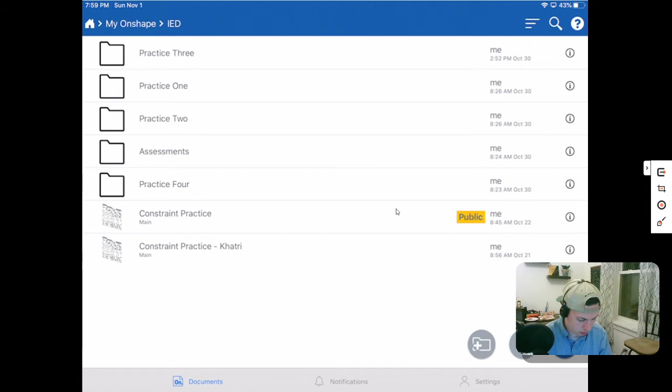So let's go into our Onshape document. This is going to be in Practice 4, so let's create that new document. It is Super Mario Brothers 2.

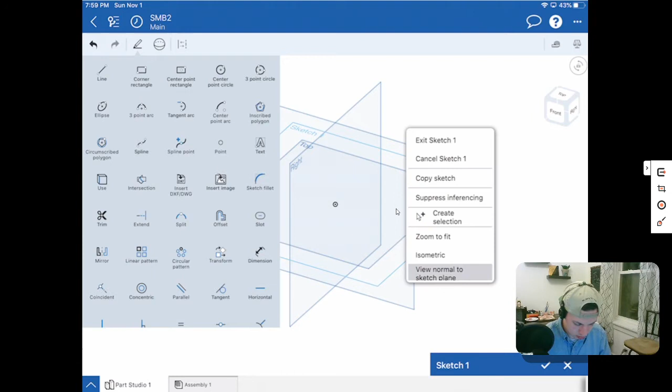I'm going to start by sketching on our top view over here, and view normal to plane. Then I'm going to draw a line — this is going to be the center line all the way through it. Let me undo that.

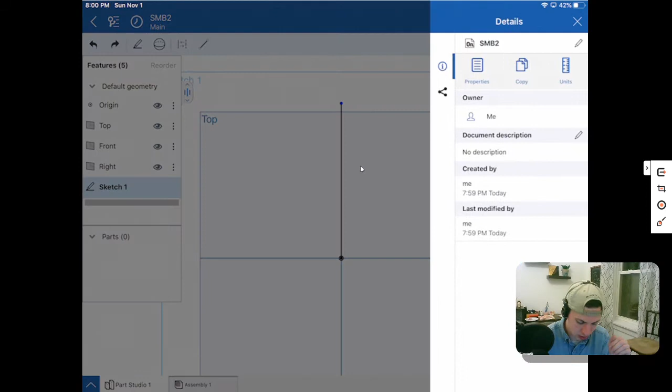Now what I should also point out is that this drawing we're doing is metric. So I am going to change my Onshape settings — our units, we want to change our length from inches to millimeters, simple as that.

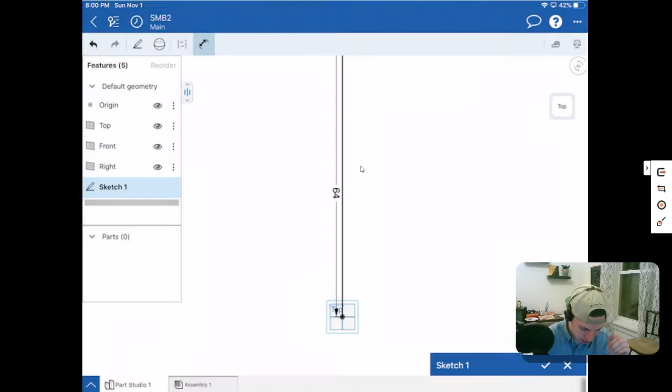Now I'm going to dimension this line from there to there — this is 64. I don't think it quite got that the units were changed. Yeah, there we go — it didn't quite change those, so we'll set that back at 64.

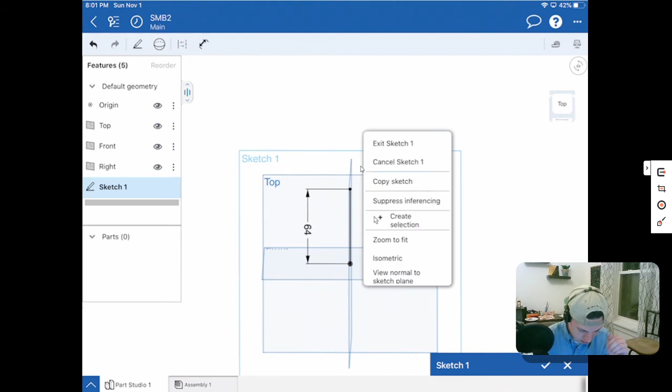Now the next feature I'm going to draw is the circle and the arc over here. So we have a circle — it is a diameter or a radius. Our outside is a radius of 15, while the inside circle is a diameter of 15. So let's draw both of those.

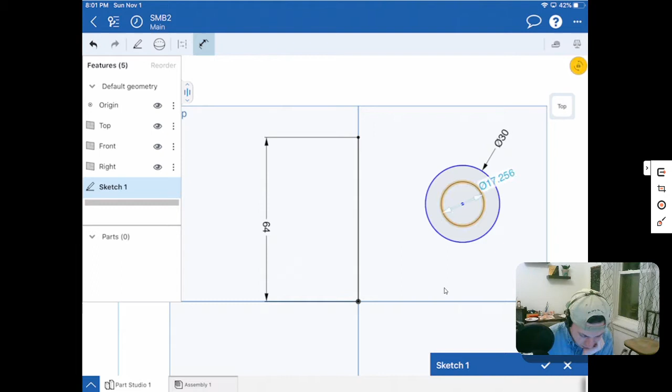Inside of our view over here, I am going to draw a circle with a center point here, and then something that shares the same center point out here. The first one I'll dimension with a radius of 30, or a diameter of 30, because it has a radius of 15 — that's actually our arc. And then this one will be a diameter of 15. So we have both of those.

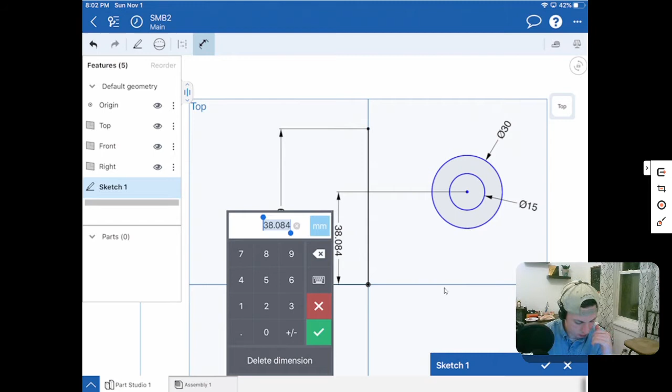Now we can also dimension our center point to our origin, but we want to make sure it is going out like this and it is flat. We don't want an angular dimension, so we want our dimension to be going straight up and down, vertical. And then this is half of 64, which is 32.

Now we need to find our dimension from there to there, but just our horizontal distance from our origin. When we look back over here, we can find that our horizontal distance is 38. So we'll set that at 38.

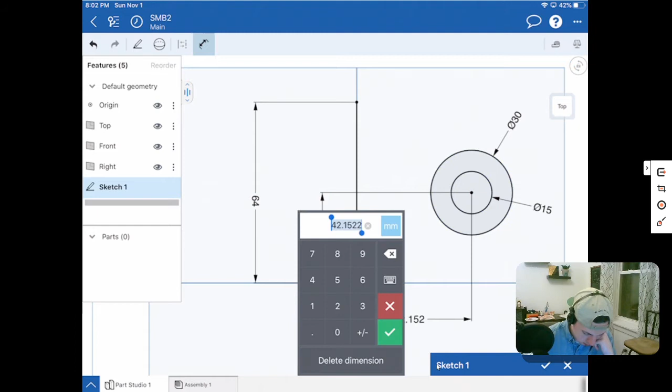Now the next thing we need to do is a real minor detail, but it is important. We want to make sure we have this edge right here — this is a flat edge, and then we go tangent. So we want to draw that flat line over here. In order to do that, we need to find the distance. The radius of this arc is 15, which means from the center to the outside is a unit of 15, so this length right here is 15. Then we can make our tangent point.

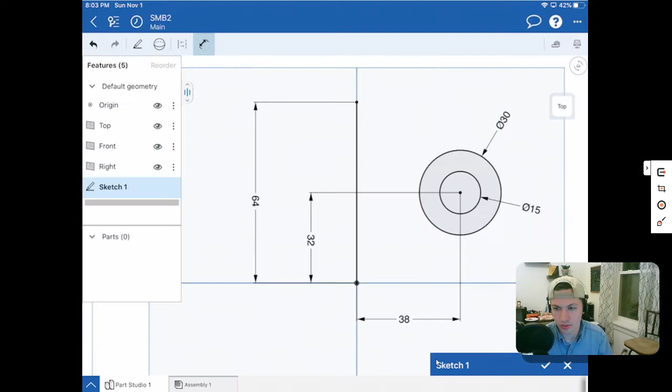So let's go into OnShape, and then we are going to draw a line over here from here to here, and then dimension that.

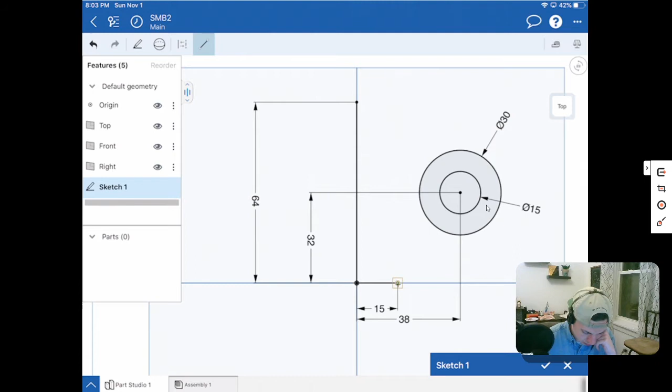So this unit right here is 15. Now when we draw a line, we'll draw from this end point to our circle. Once we get those dotted, it's going to say that it is tangent and it just pops into place right away. But I'll show you what it looks like if we didn't do that.

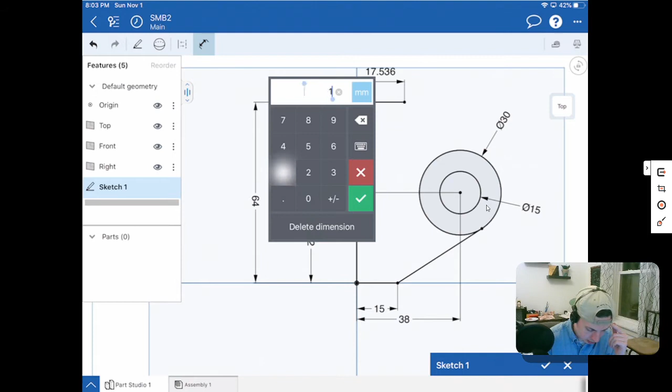If we weren't going that route, and we still have to do this on the other side, so you should follow along. This line over here, if we go from there to there, we want to make that 15. But when we draw a line, if we draw this and we don't have it connect except to the edge, it's not going to be tangent and we get a blue line.

So in order to change that, we'll highlight the line and the thing that we want to make tangent to, and hit our tangent constraint. Then it will snap into place.

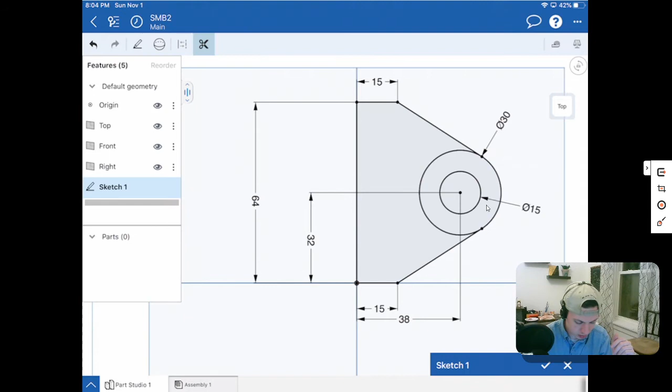Now we're very close to being done with this first part of the sketch. The one thing we do have to do is trim out this section over here. Get rid of that. All right, so now that is all done, I can finish my sketch.

I'll view that isometric. I'm going to turn off all these points except for my origin. I may need to reference that a couple more times, so I'm going to keep that on.

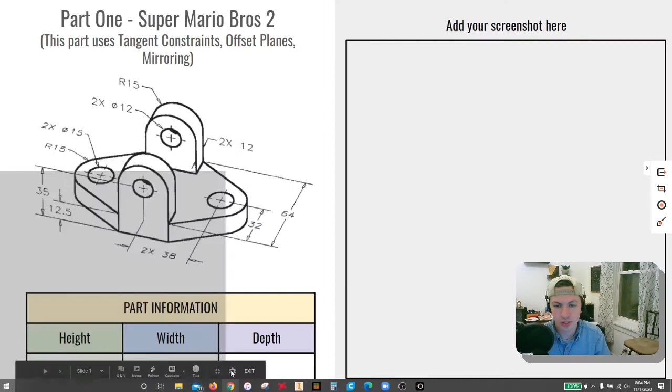All right, so let's extrude that bottom face that we just made. It's a new solid, and I believe it's 12.5, but let's double check. It is, yes, 12.5 millimeters that we are extruding up.

All right, so let's go back into Onshape. We are going to say our depth is 12.5. We'll extrude that, and we're going to hit our check mark.

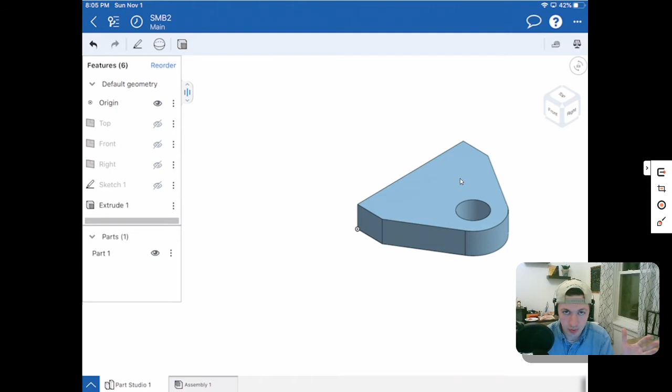Cool. Now, the reason that I just drew half of this is because it's so much easier just to mirror everything that we've already done. So let's go about mirroring this.

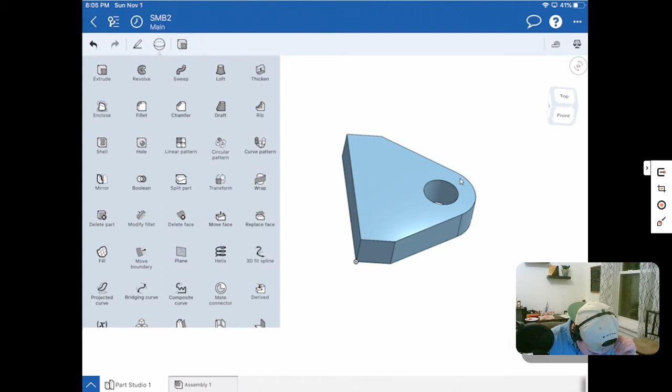So what I'm going to do is go to my 3D modeling tools, and I am going to find my mirror command. Ah, there it is. It took me too long to find it.

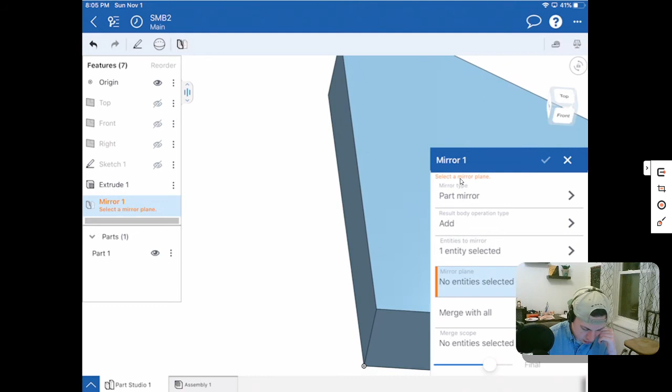It's right over here. So with mirror, we're going to add, and then the entities that we want to mirror are part 1. Then our mirror plane, the thing we want to mirror it along, is this face over here. Then we get an identical replica that has just been created.

We can merge them all together. Merge scope doesn't really quite matter, it's going to throw together because we've already added it to the operation. If we're creating a new body, we could merge them together, but we don't really want to do that.

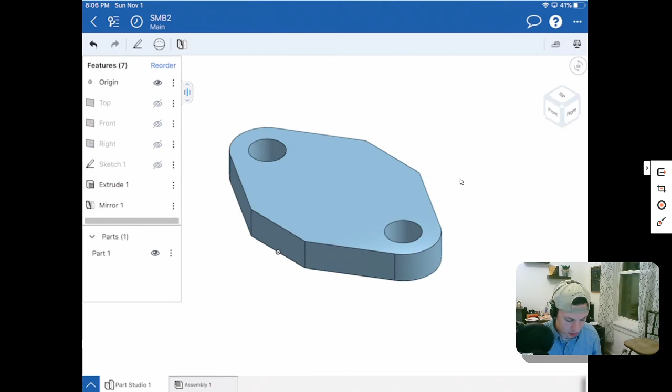All right, cool. So now we have this part of the shape done, and I now want to draw those towers that appear on both sides. So let's go take a look at those dimensions real quick, and then we can throw those onto here.

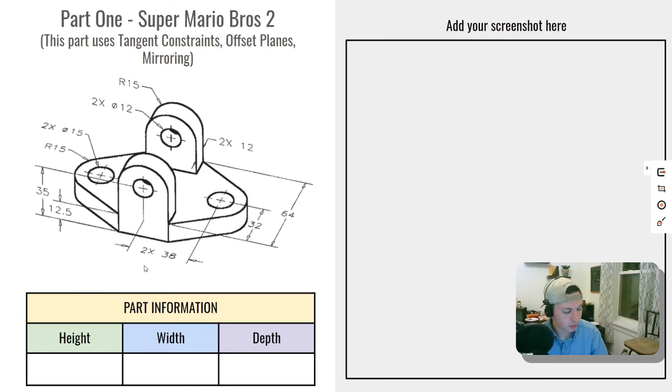All right, so we already drew the little base over here, but let's figure out from our edge, or from the bottom edge, we're going up 35 and placing a circle that is a diameter of 12 with a radius 15 arc around it, and then that just comes straight down. So that's pretty simple enough, let's just go and do that.

So I'm going to start a sketch on this little plane over here, and I'm going to view that normal. Cool, so now let's grab a center point circle. You can see it lines up with the origin. I knew I kept it for a reason.

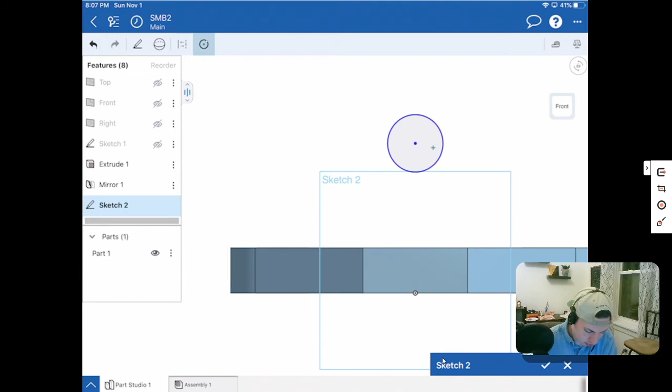Perfect, and we're actually going to draw 2 circles. So the first one had a radius of 15, so we're going to make that a diameter 30, because remember, we're dimensioning it right now as it is a circle.

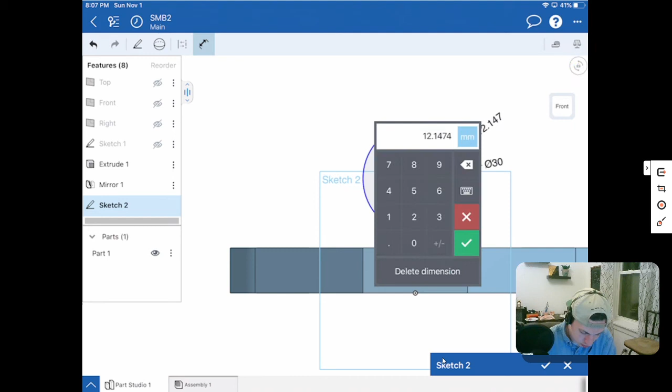But when we actually measure it, it will be a radius once we have trimmed it. So we're going to set that at 30. And then this inside is actually 12, which I was pretty close to. All right, so now the next thing that we need to do is set the height of it. So from here to here, that was a distance of 35.

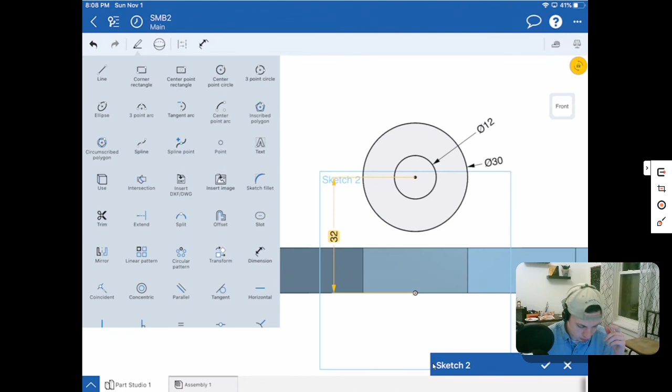Double tap the dimension to make an edit. I want to say it was 32. Let me double check. It was 35. I'm glad I double checked that. So I'll double tap there and make that dimension 35.

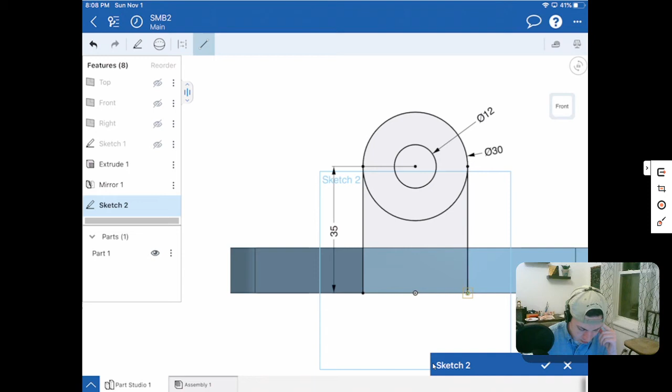Now we're going to take our line command and go from this corner down here all the way until it intersects. We'll do that again for the opposite side, all the way down from the edge down there. And just for good measure, I'm going to draw a line connecting these two at the bottom here, so we have a fully formed shape.

There's no open edges. I'll take my trim command and trim out the bottom part of that arch, then click done. Then I can view that isometric and now I am going to extrude that.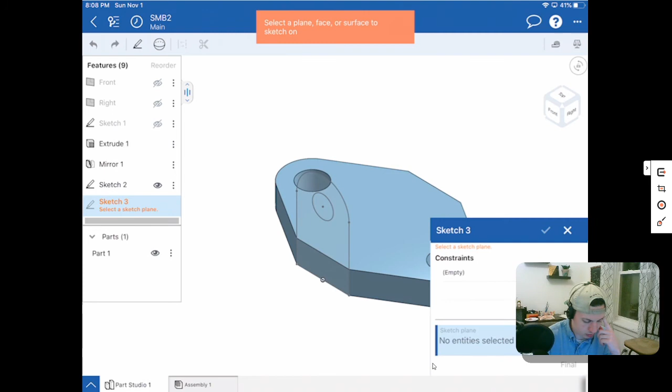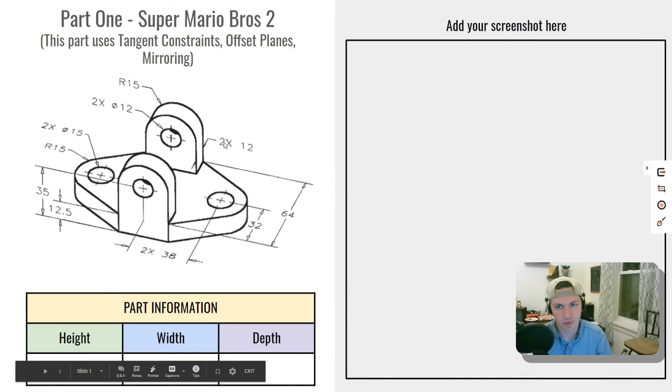So we'll extrude that. We don't want it to be new, we want to add. We'll switch to the opposite direction and then set the distance that we are extruding inwards. If we look at this, it's a thickness of 12, just 12 over here, that's that dimension over here. It's saying that it's 2 times because we have 2 of those pillars, but I'm going to show you a trick once again. So we'll set that to 12 and hit done.

There we go, we are so close to being done here. Now the last thing we're going to do is a totally new command. When we start a drawing, we get 3 planes that start: our top, our front, and our right side plane. Now we can create more planes than just these.

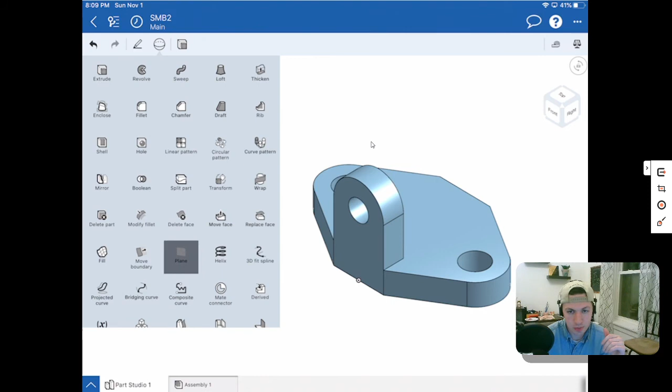So how we do that is inside of our 3D modeling commands, we have this command right here, plane. When we choose that, we have different types of planes: plane point, line angle, 3-point, mid plane. I'm gonna do the offset plane, it's one of my favorite planes. What you need to do is select a plane to offset from.

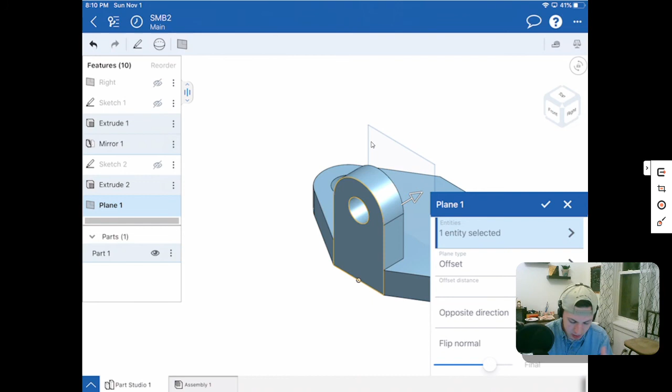So I'm gonna offset from this face and move the direction inward this way, and we want to make it right down the middle. So our right down the middle point would be 32 millimeters. Now I'll hit my check mark over there, and if I look from the top view, you can see that plane occurs right in the center.

Now we can use that as our mirror plane so we can practice mirroring once again. So I am going to go into my 3D modeling tools, select mirror, and I'll choose... let me start that over. 3D modeling, choose my mirror, and I'll choose— oh, it's having me select the whole part. Well, maybe if we choose add.

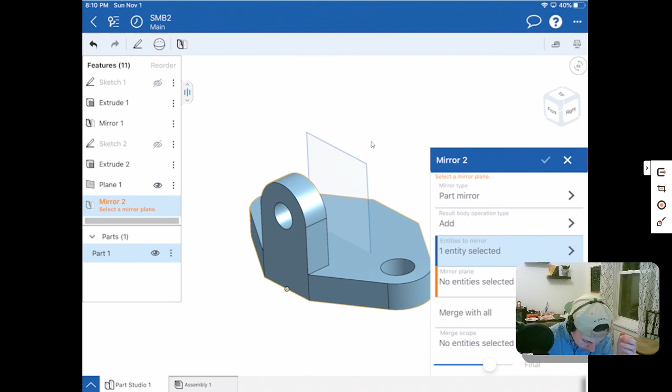Mirror feature, we just want to select the mirror type of mirroring feature. So I am just going to select my extrusion number 2, that's going to be the feature that I want to select. And then our mirror plane, we're going to select that right there. And bada bing, bada boom, we have done it. I'm going to turn off the mirror plane, just like the visibility of anything else that we have done.

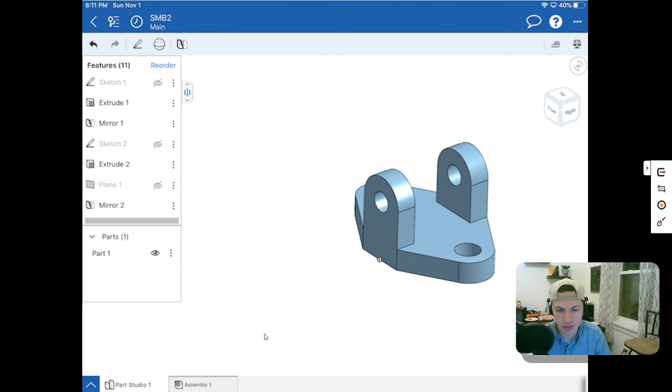Well, let's visit our sketch, make sure that we didn't forget anything. Yeah, looks all good. Cool.

So now we'll go back into our drawing over here and check how we did with our volume and mass. There we go. So we get a volume of 79,317.695 millimeters cubed, and then a surface area of 19,743.48 millimeters squared. So that is how you do Super Mario Brothers 2.